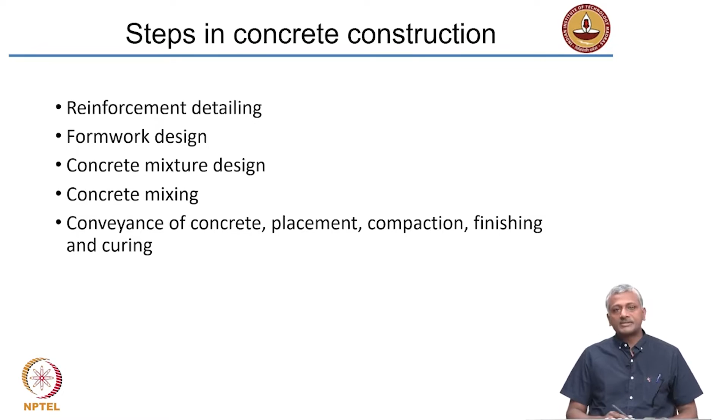And then finally, after mixing, the concrete is conveyed to the site. If it's far from the site, it needs to be conveyed with the help of trucks, for instance. After it reaches the site, it is then delivered or placed, then compacted, finished, and finally cured until it reaches the right level of strength. So these are the processes that are involved. Let's take a closer look at each one of these processes. First and foremost is reinforcement detailing.

Now, in terms of the behavior of a reinforced concrete composite, the primary factor that controls the properties of the composites is the way that the steel is spread across the system, or rather, in analysis, you figure out what are the loads that are coming onto the structure. You need to figure out wherever tensile loads are coming and then make sure that you have sufficient amount of steel in the tensile locations.

In most cases, from the design and performance perspective, in a reinforced concrete structure, the steel reinforcement detailing is perhaps one of the most important aspects which will control the performance. Now, as I said, you need to do a detailed structural analysis and determine where the tensile zones are, where you are getting tensile loading, and the design basically incorporates concrete and steel in such a way that the steel is distributed evenly in the zones that need to carry tension.

Just for example, if you have a beam which is supported on the two ends, and of course the beam is getting loaded from the top. So what will happen in most situations where it is simply supported, it's going to bend like this. The beam is going to have a shape like this after it bends. So this means that the bottom fiber where you have stretching, that's in tension, and the top fiber is in compression. So the steel essentially has to be provided close to the bottom of the beam.

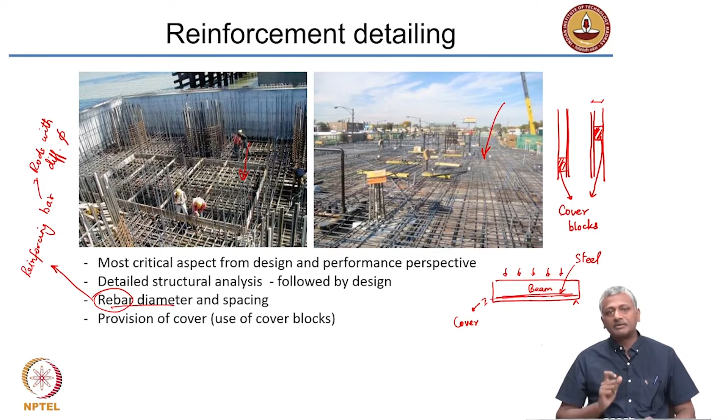The next process, of course, is formwork design. I am not saying these are sequential, I am saying all these processes need to be done for concreting to be completed. Formwork essentially defines the shape of the concrete structure that you are going to get. In most cases we deal with rectangular or cuboidal shapes. We do not really worry too much about curved sections, but there are several examples of construction where curved sections are also used. In such cases, you need to design the formwork appropriately with the right blend of materials.

There are different formwork materials. In most job sites, formwork is made out of plywood or other pieces of timber. In such cases, you can imagine that the reuse is going to be limited with timber formwork. Why is that? Because concrete, when it is placed, is wet, and that wetness will affect the quality of the wood. The more times you reuse it, the more times it gets wet, and the wooden formwork may warp or change its shape.

On the other hand, with metallic formwork like steel or aluminum, you can retain the form quite well. In fact, today for many multi-storied buildings, aluminum formwork, which is what is shown here, is highly preferred because it gives an excellent finish on the surface and it can speed up the rate at which you build up floors. It is the material of choice because you can increase the productivity, the speed at which a given floor can be constructed. People are trying to cut down the time.

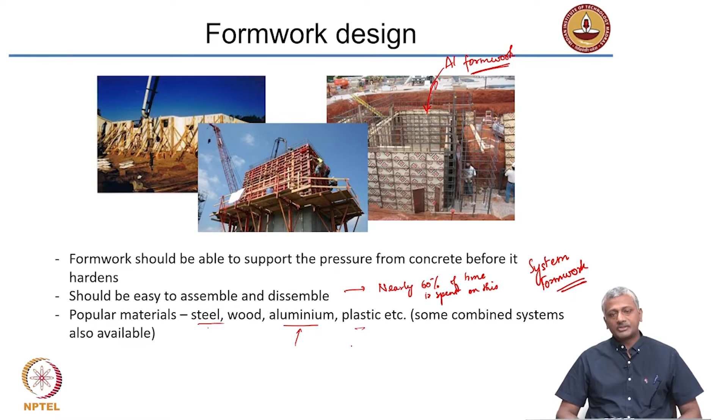Reinforcement and formwork are not directly connected to concrete, but they are important from the perspective of designing the composite structure. Now let us come to the concrete part itself. One of the most important steps is proportioning your ingredients, that is cement, water, sand, coarse aggregate, mineral admixtures and chemical admixtures, so that you get a composite material capable of certain levels of performance.

Now, what is this performance? Generally, concrete is designed to get a required compressive strength. Remember, concrete is good in compression, poor in tension, so for tension you provide steel, and concrete takes care of the compression. So you design concrete for its compressive strength in most cases. In certain circumstances, the concrete's resistance to cracking is also very important, like in the design of concrete pavement slabs.

In those cases, tensile strength is also considered to some extent. But in most cases, concrete compression strength or compressive strength is what you need to design for. Okay? And the other aspect is the workability.

How easy is it for you to mix, place, compact and finish the concrete? Okay? So, workability is a term that loosely defines all these processes coming together. We will take a look at these individual processes separately. Okay? So, concrete has to be designed to achieve a certain level of workability.

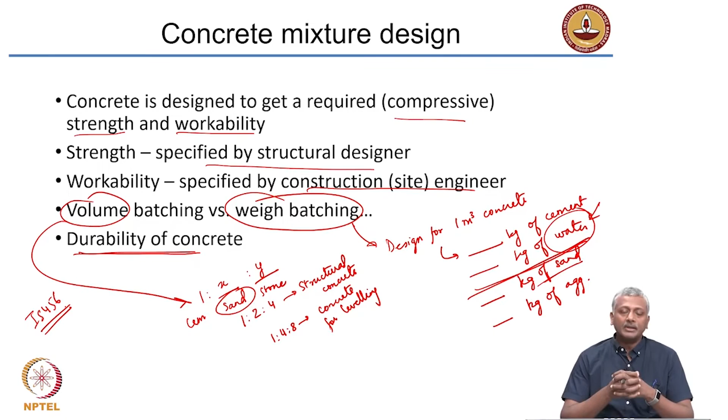For example, if you are designing a concrete structure for the coastal area, the requirement of the concrete to survive in its given environment is going to be quite different from the concrete that is designed in an inland environment, which is 300-400 kilometers away from the coast. There the requirement of the concrete to survive in that environment will be quite different from what you have at the coast. So, that's another consideration that you need to have while selecting the mixture proportions or mixture ingredients to design concrete for a particular structure. So, workability, strength and durability.

So, what has happened over the years is that structural engineers who define the strength have been having the say in the kind of concrete that they actually get. But today increasingly people have realized that it is the durability of concrete and the associated aspects that come with it which govern the performance of the structure much more than the strength. In most cases, strength is not really a consideration because we usually over design the structure with respect to strength. But with respect to durability, if we don't have a clear understanding of the environment and what can happen in that environment, we could be in for a lot of problems with respect to the concrete structure. So, today increasingly the focus has shifted to durability, and because of this there is one more additional person that needs to come in for large projects, and that is a concrete technologist.

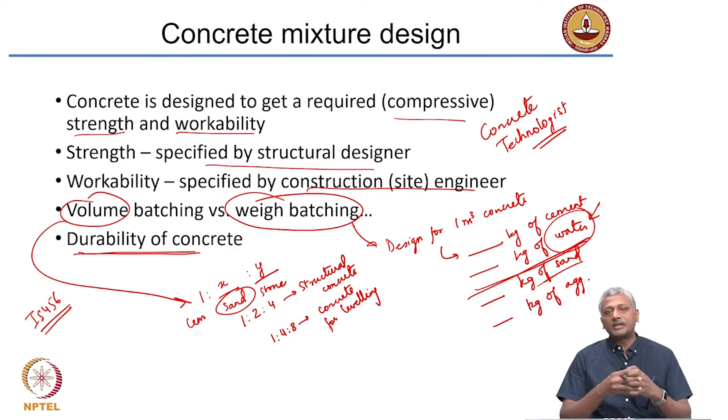So, workability, as I said, is the ease with which you can handle the concrete, place it, compact it and so on. So generally, it is the ease with which concrete can be handled without harmful segregation. What is segregation? It is a separation of the constituents of concrete. As I said earlier, concrete is a very heterogeneous material. It's got ingredients which are at completely different size scales.

Cement particles are a few microns. You have sand ranging from 75 microns all the way to 4.75 millimeters. And you have coarse aggregate going above 4.75 all the way to 20 or 40, depending upon the kind of concrete that you have. Because of the relative sizes and differences in densities, and because water is involved, you can have separation of the constituents. So, workability is defined as the ease with which you can handle the concrete without causing segregation.

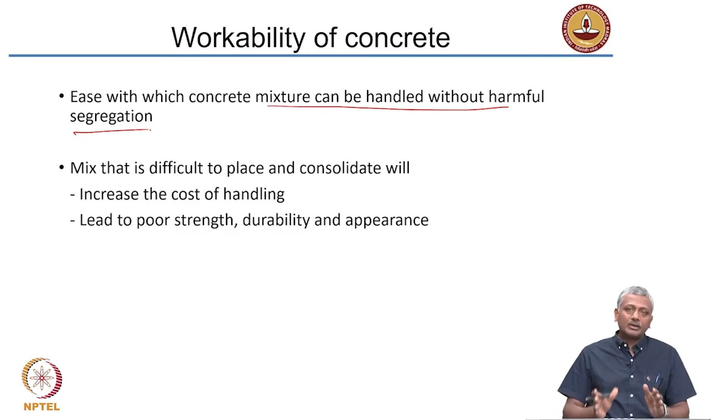Now, a mix that is difficult to place and consolidate will increase the cost of handling and also lead to poor performance in terms of strength, durability and appearance. So, you need to provide concrete of the right level of workability. It is very important that you do so. Now, there are several measures of workability that are used on construction sites. Many of you will be doing experiments in your college determining the workability of concrete as per one of these methods.

The most common test, used everywhere, is the slump test. As the diagram indicates, this is nothing but a cone which has an upper diameter of 10 centimeters, a lower diameter of 20 centimeters and a height of 30 centimeters. You fill your concrete into this cone in 3 or 4 layers, depending upon what standard you follow, and each layer is compacted by a rod called a tamping rod. You compact each layer, fill up to the top, and then remove the slump cone.

Concrete that is nicely workable and flowable will start slumping down like this. That means because of its self weight, it starts settling, and that settling is called the slump. A concrete mix that is a lot more cohesive and less flowable will slump less. This is more workable, this is less workable. So, a workability test like the slump test defines the workability or consistency of the concrete mixture.

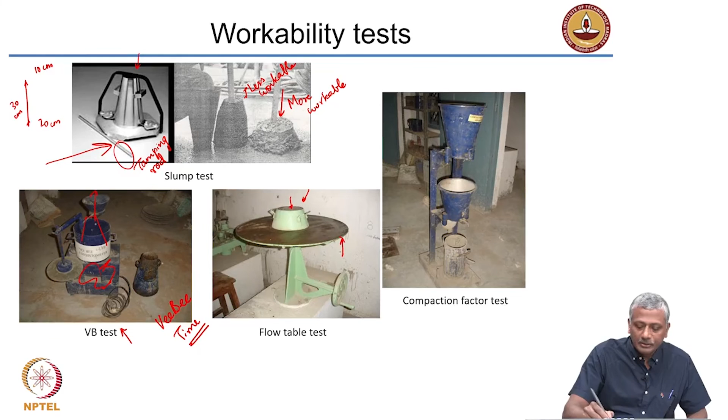Another test which is commonly used is a flow table test. So, here you put your concrete inside this frustum of a cone, lift that, and then you have this table which is jolted up and down a certain number of times. Okay, what will happen because of this jolting? The concrete will get vibrations and it will start spreading out. Then you measure the total spread of the concrete, and that spread is basically called the flow table spread. Okay, it's usually measured in millimeters.

Another slightly complicated test is the compaction factor test, where you fill up the concrete in this top bucket. You have a trap door here which you open. So, what happens is concrete falls into this second bucket, and then you have another trap door, you open that and the concrete falls into the cylinder. So, what is this trying to measure? It is trying to measure the ability of the concrete to compact. Okay. So, a concrete that is highly workable will be easier to compact.

So, in other words, when you open this door and the concrete falls here, and then you open this door and the concrete falls into the cylinder, a lot of the cylinder's volume will be filled up by the concrete. On the other hand, what will happen in the case of a concrete mix that is stiff and less workable? What falls into the cylinder will fall with a lot of voids inside. It will not get compacted properly. Okay, so you can measure what is called the compaction factor. But in most construction sites, what you will see being used is only the slump test.

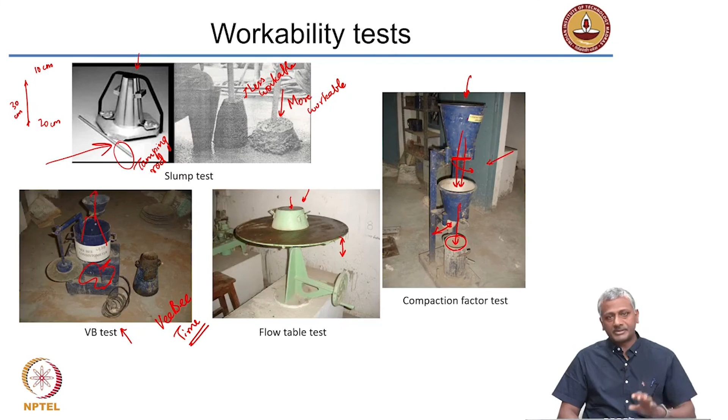Now, this is just an indicative qualitative classification of the concretes based upon the performance in different workability tests. So, as I said, when you have a flowing concrete, you have a very high slump, concrete that is very plastic and flowing. Okay. Sometimes you get slump of more than 200 millimeters also. Please recall, as I said, the total height of the slump cone is 30 centimeters or 300 millimeters. Okay. So, the maximum slump that you can typically have is only about 250, because you have aggregates inside. So, the concrete cannot slump to more than 250 millimeters. Okay. So, in some cases flowing concrete can have 200 millimeters.

I will also talk about a concrete that is only flowing, that does not really show a slump, but it shows more of a flow, okay, that I will talk about later. A plastic concrete is 75 to 100 millimeters, a stiff plastic is less than that, and a stiff concrete is 0 to 25. When you are talking about extremely dry concretes, for example, when you are doing a pavement construction with concrete, many of you may have seen that for pavement construction with concrete, they make the mix extremely dry. Okay, it is not having a lot of water, it will not be flowing, it will have an extremely dry consistency.

When they place it, they will put a roller above it and compact it. That is one of the ways in which they do it. The other is they will push this through an extruder or a paver, and then get the shape of the slab perfectly made. In such cases, if the concrete is too workable, the slab will collapse, and you don't want that to happen. So in such cases, you need to mold it properly.

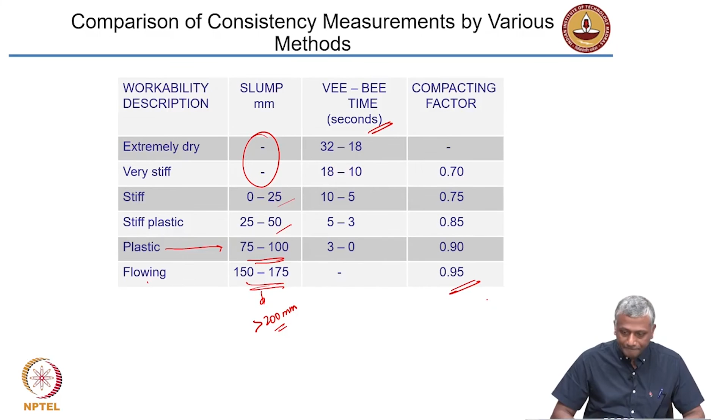Now, again, just coming back to this weigh batching versus volume batching aspect, as I said, in volume batching you basically need to have a container, either a cylindrical or a cuboidal container, which contains exactly one part of the material. So when we say 1:2:4, 1 part of cement to 2 parts of sand to 4 parts of stone. Okay. So what happens is this

So if you pour the contents of 1 bag of cement, they will exactly fit this volumetric container that we use at job sites where volume batching is practiced. Now what is the advantage of that? In your mixer, you don't need to measure the cement in this volumetric bucket and pour it. You can directly pour the cement from the bag itself, because this bucket measures a volume equivalent to 1 bag. So you only need to make measurement for sand and stone.

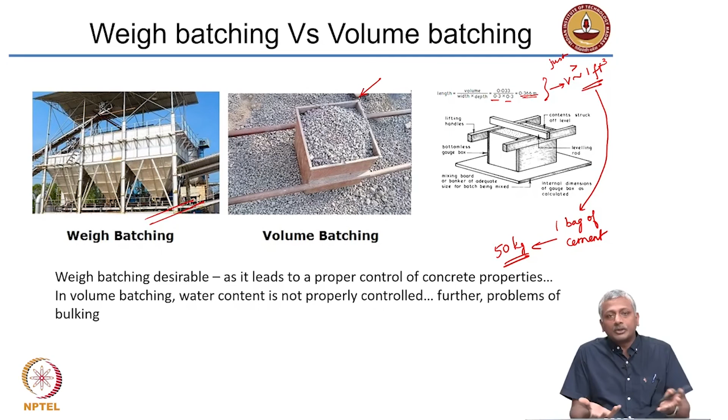I already talked about the fact that with volume batching, you can't control concrete properties well enough because there is no clear measure of the amount of water that you add, and secondly, you'll have problems of bulking when sand is stored out in the open. When moisture affects the sand, it will increase the volume of the sand without really having that much sand. You'll think that you have enough sand, but in reality there will be a lot of moisture present inside.